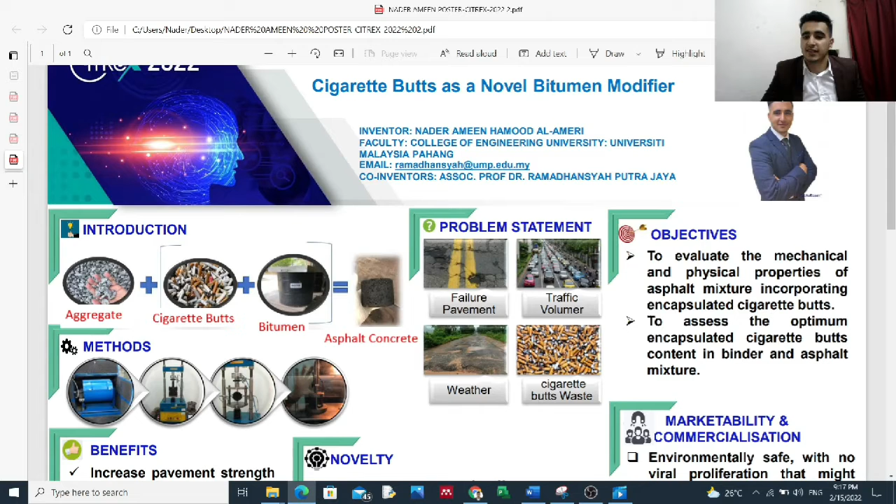I have two objectives: to evaluate the mechanical and physical properties of asphalt mixtures incorporating encapsulated cigarette butts, and to assess the optimum encapsulated cigarette butt content in binder and asphalt mixture.

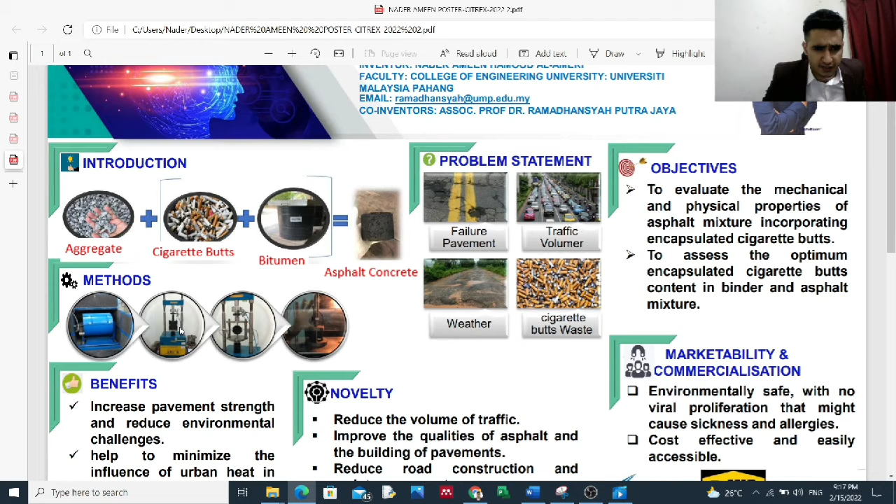For the methods, I have 4 tests. Every picture has one test. This one for the Cantabro test, this one for the Marshall stability test, the ITS indirect tensile test, and the last one is the dynamic test.

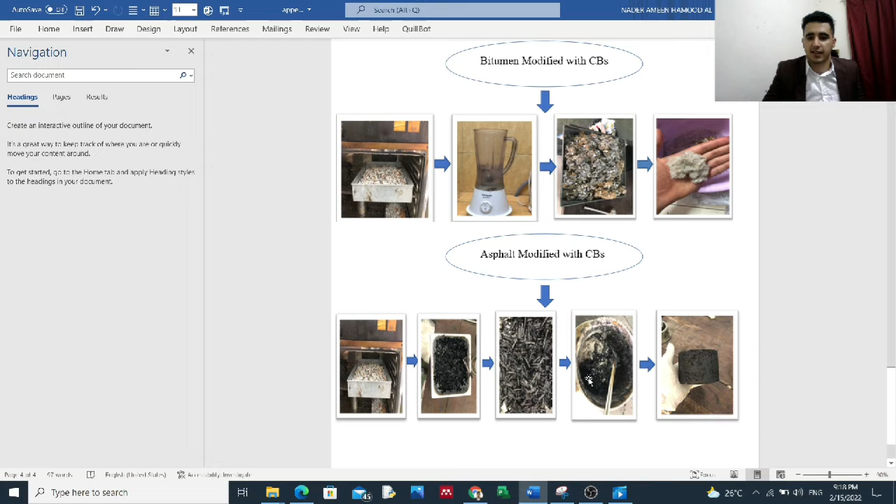In the methodology, I have two things: asphalt modified with CBs and bitumen modified with CBs. Here I use a simple machine, a home blender, to blend the cigarette butts so they become fiber cigarette butts. This one I mix with the bitumen. For this one I use encapsulated cigarette butts, which I mix with the aggregate in asphalt concrete.

For the benefits, it will increase pavement strength and reduce the environmental challenge, and help minimize urban heat in tropical cities as temperatures escalate with global warming. For the novelty: improve the quality of the asphalt and pavement, reduce road construction and maintenance cost, and reduce landfilling and environmental pollution.

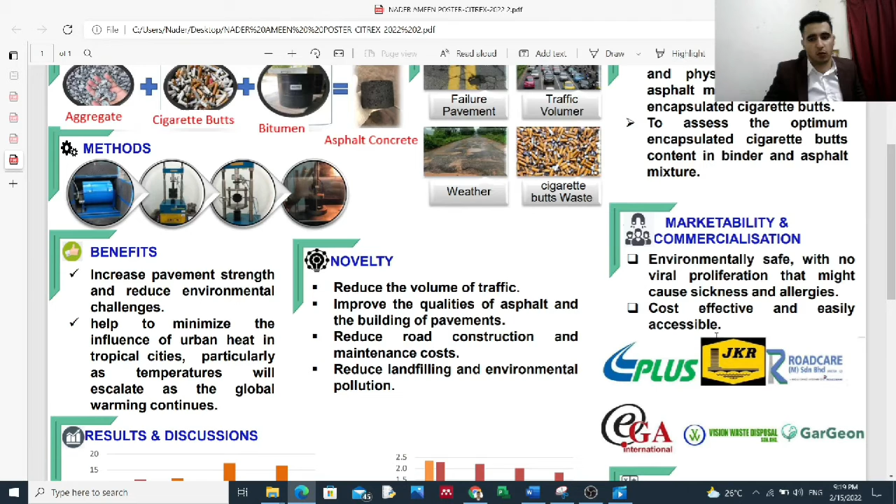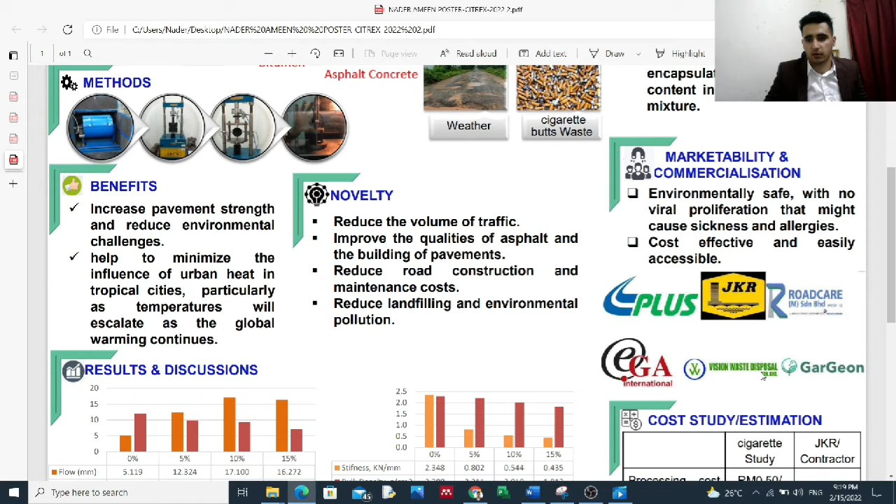For marketability and commercialization: environmentally safe with no viral proliferation that may cause sickness to people living in the environment, cost effective, and easily accessible. This is the marketability for this project: the highway, the road safety award for PLUS and JKR road care, and this is for the material that I'm going to use.

For the results and discussion, figure 1 is the relationship between stability and flow for the different percentages used. The flow and stability at 0%, the control sample, give the best result. For the modified asphalt concrete, the best one is 5% according to flow and stability.

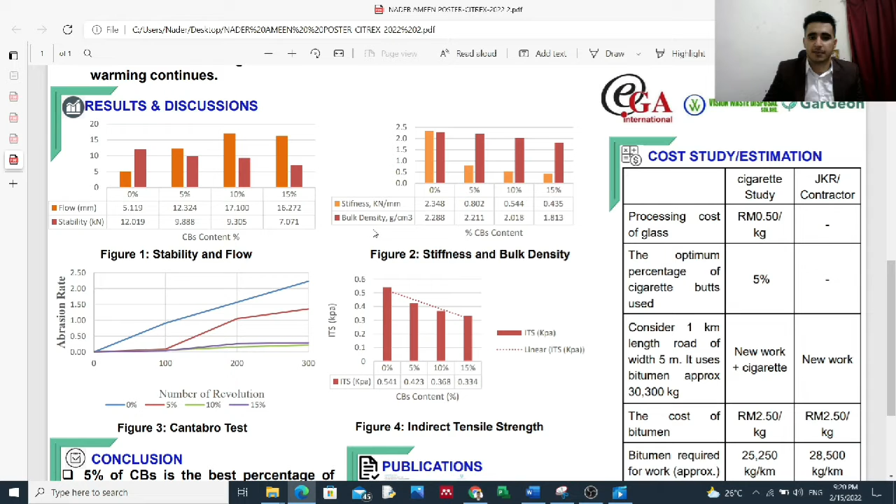The next figure, stiffness and density. Same thing, 0% as the control sample is the best one. But among the modified asphalt concrete, the best one is 5% because it has the highest stiffness and the highest bulk density. So 5% is the best one.

In general, the sample that shows the lowest weight loss is the best one. Here, in green, is the 10%, which gives the lowest value. So the best one is 10% CBs. The 0% lost too many grams of weight from 100 to 300 revolutions.

The last one, ITS, the indirect tensile test, shows the maximum load the sample can carry. 0% is the best as the control sample. For the modified asphalt concrete, the highest is 5% CBs with 0.4 kilopascal. So here the best one is 5%.

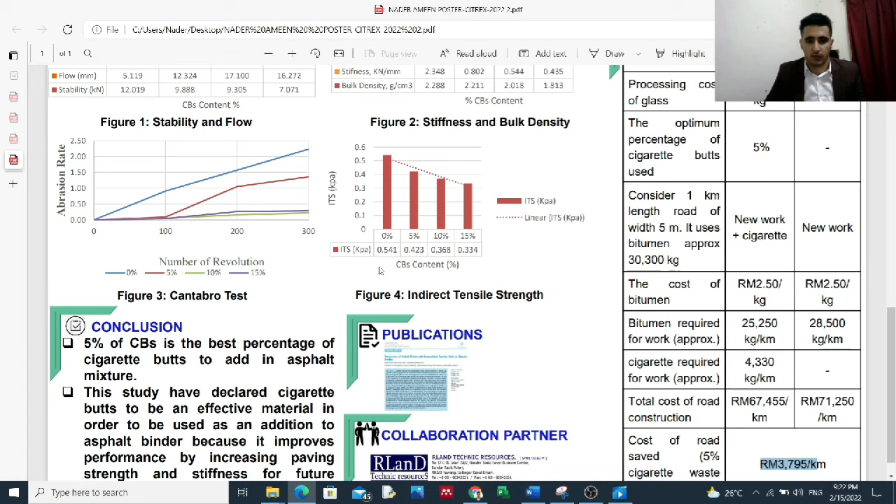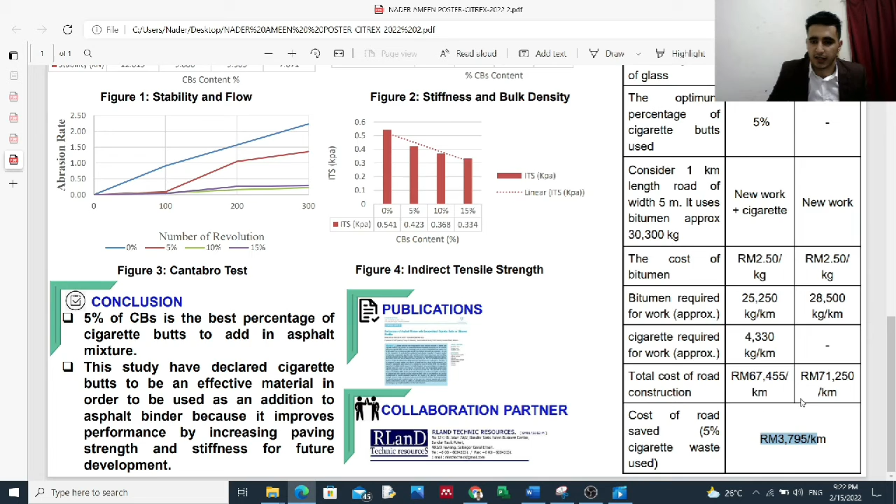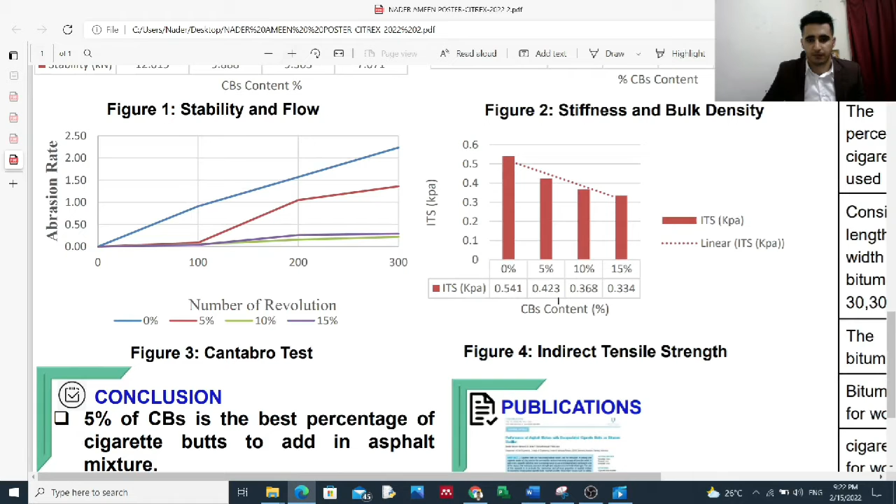The cost study compares the cigarette butt study with JKR or contractor. Using 5% cigarette butts, I can save 3,795 per 1 kilometer of road. So using cigarette butts is better than normal asphalt concrete. This is the publication of my project and the collaboration partner, RLanD Technic Resources.

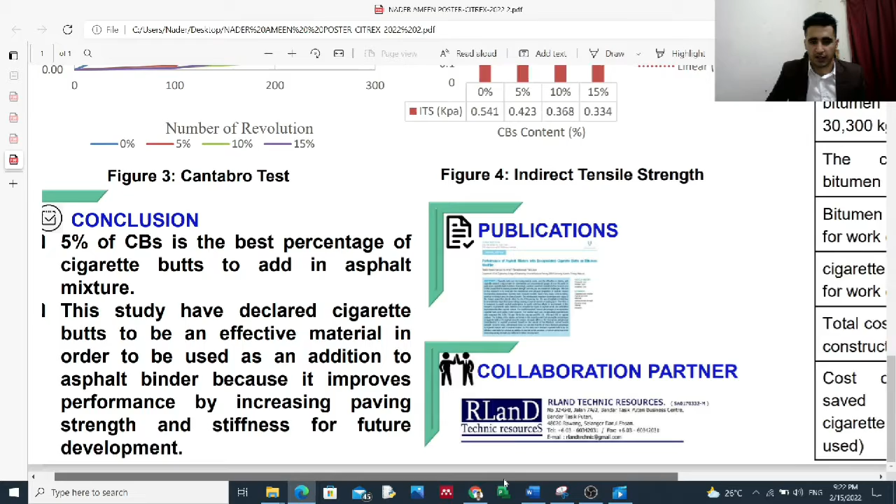The conclusion: from the results, 5% CBs is the best percentage of cigarette butts to add in the asphalt mixture. This project has shown cigarette butts to be an effective additive to asphalt binder because it improves performance by increasing paving strength and stiffness. So I solved two problems: one related to environmental issues, and the second one related to the asphalt.